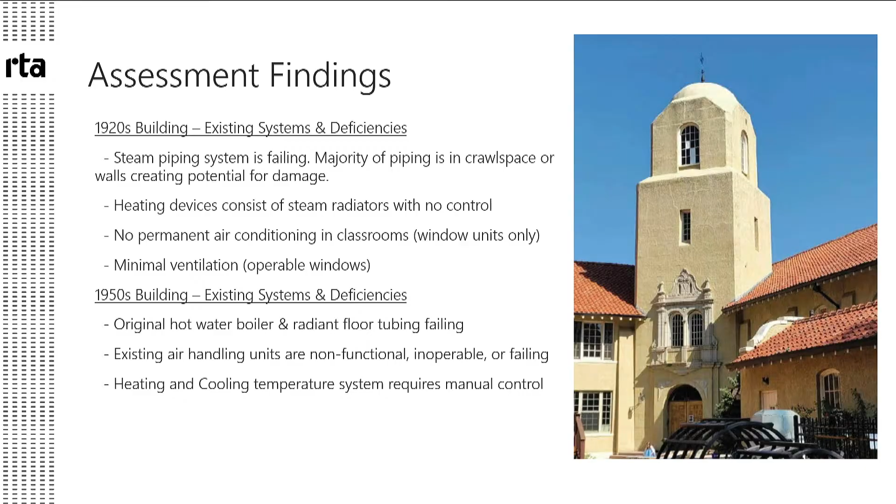The other thing you run into is they're not built the same and they're not as safe as today's equipment. If you have a ground fault, today's equipment is going to trip - boom - it's going to open up and keep from feeding electrical current to those faults. That old gear, we have no real confidence that it will clear the fault the way it should, and that fault may just sit there and continue to spark and arc and start a fire or any of those kind of things.

I heard somebody up here on stage just a few minutes ago before the meeting that they were looking at something or working on something with, I'm assuming, the dimming system for the lights in here, and said that they wanted to fix something, but they were afraid they didn't want to get electrocuted. Those are the issues you run into with the electrical.

So part of the program is to accommodate all the new mechanical. Tim mentioned that there's no HVAC in the building. When you add HVAC to the building, your electrical load goes from here to here. The gear in the building is not built and is not adequate to handle air conditioning, so it has to be upgraded.

Couple other systems that you run into - your fire alarm system. It's old as well.

Not really sure how well it's been maintained, but it seems like there are no faults in it, so that's a good sign. By today's standards, that's an old zoned system, meaning it looks at detectors in a zone atmosphere. It says, okay, we've got a bunch of detectors in one part of the building. If you get an alarm, it tells you we've got something going on in that building. Today's fire alarm systems are point addressable, meaning you'll know exactly which device is in alarm, like the smoke detector in room such and such, northeast corner. So the fire alarm system should probably be upgraded, and we've talked about that, and we've got some things in the program and the project to address some of that. But because of budget, some things are limited, and we're trying to prioritize things and spread the money where it's most needed.

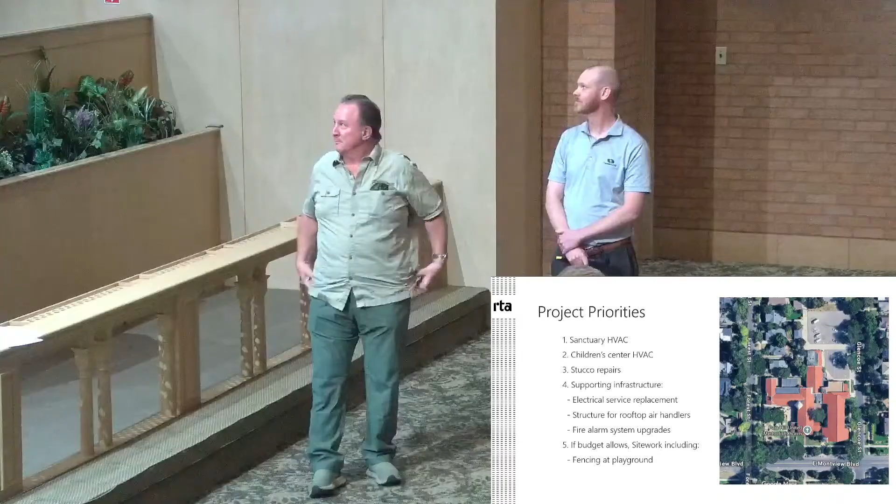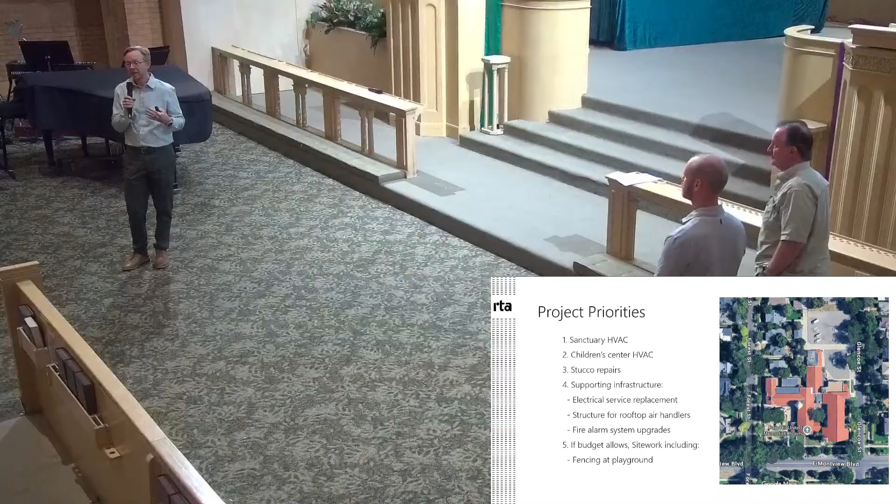Oh, there we go. So speaking of priorities, Don touched on the fact that we need to prioritize. We began early this summer; we were selected by the church to begin the design process. We began the process looking at all these deficiencies that we had summarized for the building, and we wanted to prioritize it because we know that there's more needs than there is funding. So we have to tackle the things that are the most important first.

The sanctuary HVAC is top of the list. You've got to have a functioning heating and cooling system for this space if you're going to function as a successful congregation. The Children's Center HVAC was the next highest priority. Priority 3 are stucco repairs, because we really want to make sure that if you have an area that is leaking and causing more damage to the building, that gets addressed. And then we're talking about supporting infrastructure, which is really getting to Don's point. Anything that we do with the mechanical system needs to have an electrical service to support it. And so we have to make those upgrades.

As necessary so that we can do the mechanical retrofit project. So with that electric service, we know we need to add new mechanical equipment to the building. So we've got some structural work to do on the roof to support a new mechanical unit. And then the fire alarm system upgrades are all at the top of the list. And then as budget allows, there's a little bit of site work, including realigning the fence at the front of the building where the playground is, so that you can egress through those main, prominent doors that exit the building. You should be able to get out to the public way without going through the playground. So we're looking at a minor fence realignment to accommodate that.

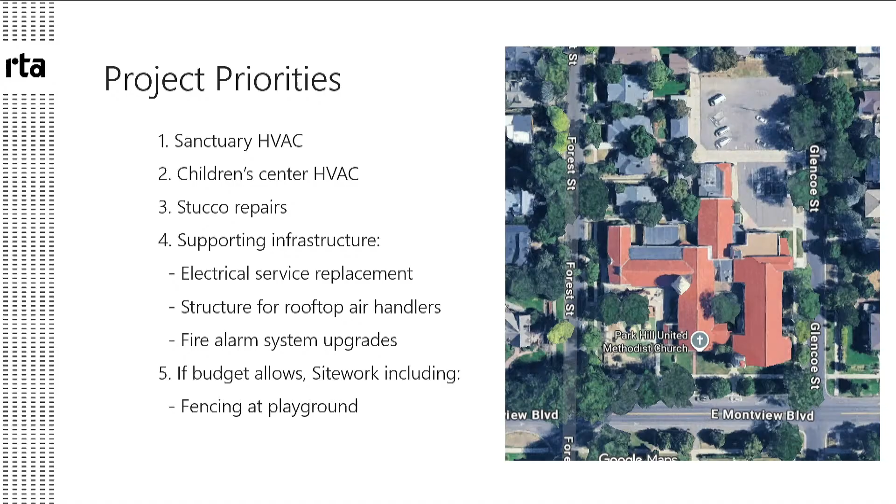My slides going here. I may need, oh, there we go.

So the summary of mechanical scope, Tim? So I'll go a little bit deeper into what I was talking about with some of the things that we're looking at for the mechanical system. On the right side of this, we've got a color-coded map. So I'll start with the Children's Center as I did before.

We asked Cindy and the building team to put together a list of priority rooms so we could have a hierarchy of which ones need to be addressed first and move through that list. Priority 1 is the classroom in blue, priority 2 is the classroom in red, both on the north side of that corridor. Priorities 3 and 4, a little less critical but still important for the Children's Center, are in yellow and green on the south side of that corridor. Looking at the sanctuary, obviously that's a very high priority, so that also follows in blue.

What we've been doing is watching the Denver codes. Denver, as you all know, is on a huge electrification push for the last couple of years. There's been a little pushback in how aggressive they were to start with, so there's been a step back in what they're allowing. I'll explain what I mean by that.

With that in mind, we're looking at providing a heating source of gas-fired equipment, taking it off the steam system, not relying on the old steam piping, and bringing a separate system in for the Children's Center so that you can isolate it from that steam system while still heating those spaces. We'll provide air conditioning, get rid of those window units, provide a permanent air conditioning system, and also provide ventilation through the mechanical system.

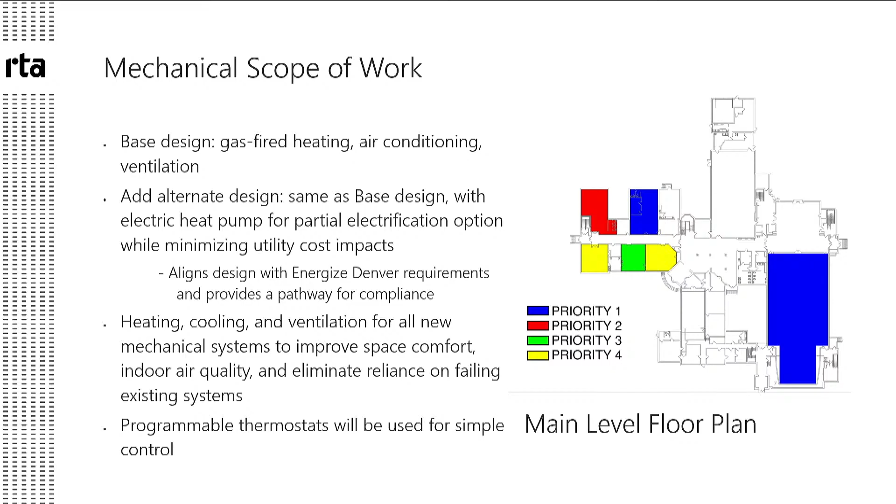Anything else on this one?

Next slide. I can run through a few of our mechanical plans. I know they're a little hard to read, but I'll walk through them. The red button is the laser. Again, building footprints—if I hit the right button here.

I think your battery died, Brian. Is it not going? No, point it at the floor—it's okay. Oh, there we go. Did I just miss it?

Okay, if you can see, the Children's Center is over on the left. We're looking at an overhead ductwork system, serving air to all of those spaces. The new mechanical equipment is very similar to your house—a furnace with a condensing unit outside.

We're looking at putting that up on the second floor—we'll get to that in a second. New ductwork runs throughout those spaces to serve those classrooms.

Over in the sanctuary, we're trying our best not to do anything within the sanctuary itself as far as our work is concerned. The existing ductwork—you can see those half-moon grills on the side. There's ductwork behind there, below the windows.

Our intent is to connect to all of that existing ductwork outside of the space to minimize any impacts to the sanctuary itself.

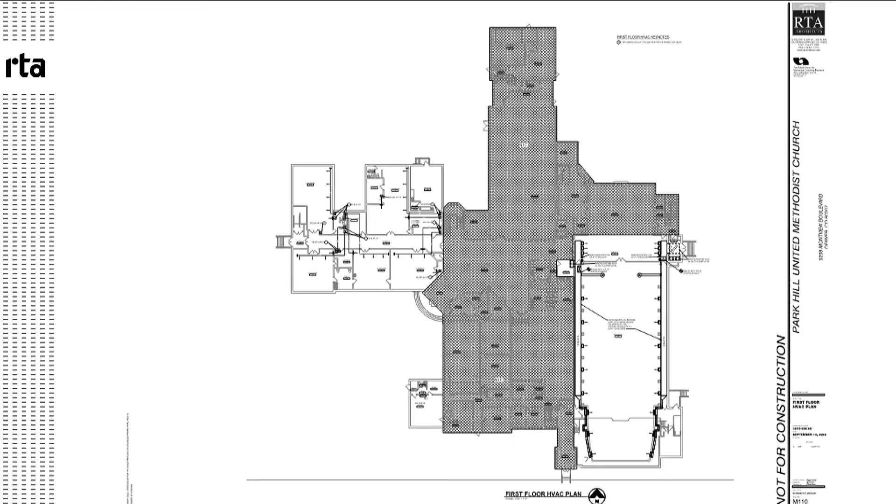Going to the second floor—oh, I'm too fast. We'll get there. Can we go back one slide? Okay, I got it. There we go.

Again, I don't know that you can see much, but there are two storage rooms on the second floor that we're looking at, on either end of that bank of offices on the north side of the hallway.

We're going to put a couple of furnaces—one on the west side, and a few next to the stair storage room on the east side. Ductwork down below serves those classrooms.

One good thing about this kind of system, going back to that priority list, is it really lets us do a room-by-room solution. It's easy for us if we need to pull a room out as an alternate, or for budget reasons.

This lets us target those lower priority rooms and take them out if needed. It gives us a good opportunity to do that, rather than doing a whole system all at once—again, a phased approach moving forward.

The sanctuary is very similar on the balcony level back there—we're not doing anything within the space itself. Ductwork runs down from the roof in some areas outside of the sanctuary, and then going to...

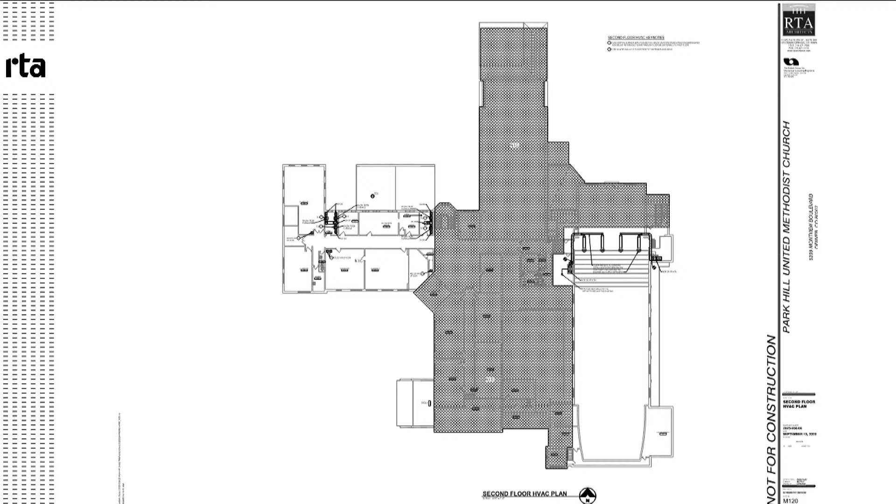...a little bit on the roof, behind and above the balcony, there's that big grill in the back of the church. Up there is another level, and beyond that is a flat roof area. We're proposing a new mechanical unit back in that area.

I mentioned ductwork down below connecting to those grills on the side—that would cover the entire sanctuary, providing all of the heating, cooling, and ventilation, replacing all of the aging air handlers down in the basement, and getting rid of the reliance on the failing chiller and boiler system.

As Brian mentioned, we need support for those mechanical systems. There's a big piece of equipment going on that roof, and we're trying to minimize what we're doing on the second floor ceiling.

We're coordinating with our structural engineer to have a frame above the roof to support that piece of equipment, to limit how much work is needed inside.

Obviously, Don mentioned power to it—there's a lot of new power needs for what we're doing. Running the new ductwork through relies on architectural as well; we need to enclose it and make it look nice in those office areas in the back.

What's not shown on this plan are the condensing units for the Children's Center—the outside units, similar to what you might have at your house for air conditioning. There's a little section of flat roof above those second floor offices, so those would go up on that space.

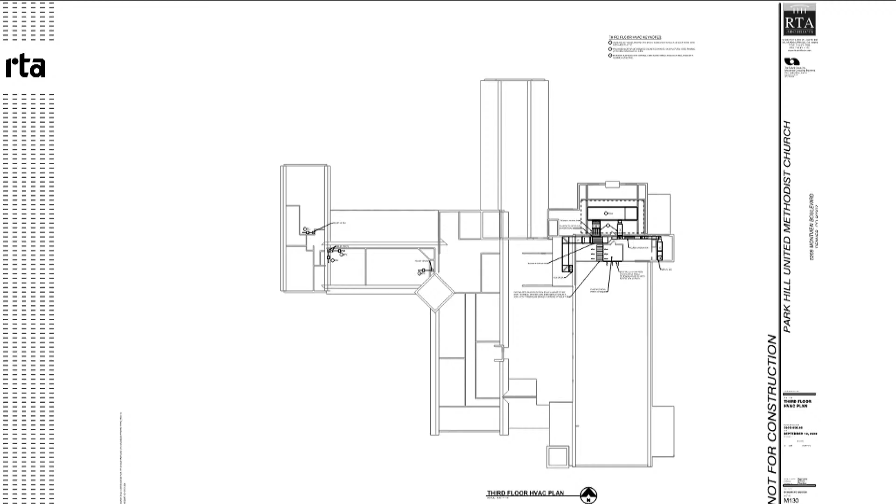So you will see a new piece of rooftop equipment. You can see it from the street, but it's not very prominent. We had a meeting with the State Historic Preservation Office because you are a historic property, so we wanted to make sure that they supported our project. They felt like this approach was appropriate.

Our mechanical unit is in the back of the building. It's not on any of the prominent elevations. It can't be seen from the front street, and it can't be seen from the main historic prominent architectural entrance of the building. They felt that it was very appropriate on the back of the building, that is the right place to put it. So they've written us a letter of support for the project.

We wanted to make sure that you understood what you would see. We can paint the unit. I think we can paint it to match the brick color so that we'll minimize the visual impact of that piece of equipment. Okay?

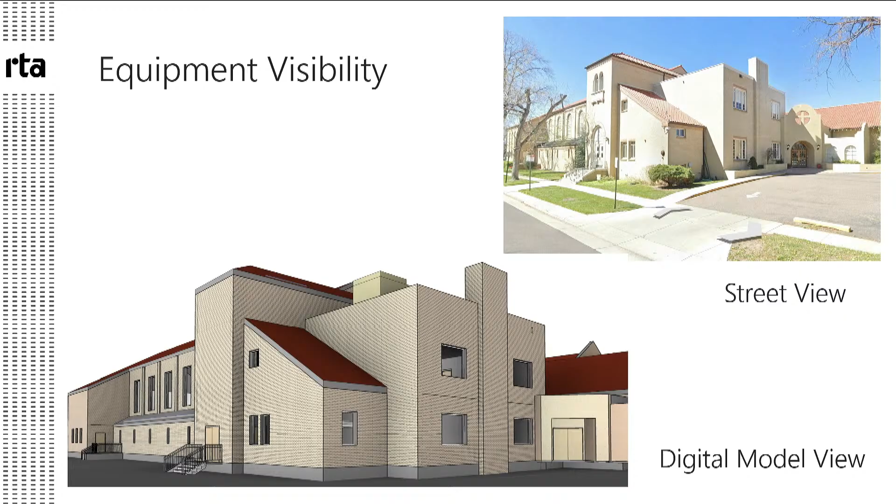Don, you're up. You get bullets this time, but you can wing it too. That's all right.

That's artwork, correct? It's beautiful.

The electrical service is rated 1,000 amps. Your new service will be 2,000 amps, but there's a huge distinction. The 1,000 amps is at 208 volts. The new service will be at 480 volts. So you're essentially getting four times the increase in your electrical service capacity.

That's going to cover the HVAC that they're putting in today, and it's also building in capacity to meet the energy needs of air conditioning throughout the building in the future. So we're trying to get that capacity in now so that you're not redoing the service again with another capital upgrade.

Increased service, I've covered that. The new Xcel Energy service utility metering and exterior main disconnect switchgear is what you see in the picture there. Right now, that was put in, I think, 15, 20 years ago maybe, and that was put there to create some safety disconnects ahead of the gear you have in the basement. That would go away, it would be replaced with a larger cabinet.

The panel boards down in the basement, we have those in the project, I think as an alternate still, Cindy, or are those base? They're part of the base bid now, so the main distribution panels in the basement boiler room will be replaced. So your entire electrical service and distribution infrastructure will be upgraded to accommodate all of these future loads and any changes you make to the building going forward.

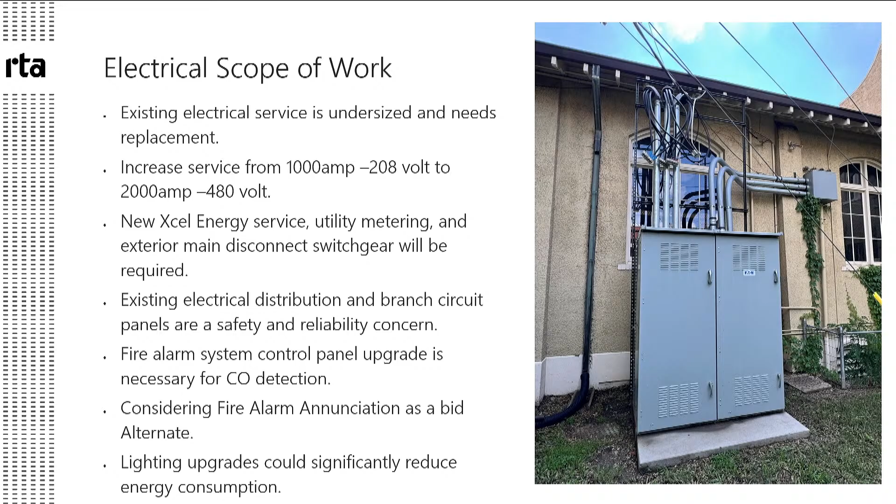I just want to make sure I understand what is not part of this whole project. So, for example, the pastor's offices, the Murphy Room, Babs Chapel, the coffee bar - that's not part of this upgrade to the HVAC, correct?

That is correct. We're putting the infrastructure in now, so the electrical service would support the addition of those elements on kind of a room-by-room basis.

Would you repeat the question? I just... Okay. We have 10 persons online, Gotcha, and they probably couldn't hear Chris, so if you could repeat that. Yeah, and I'll have the mic independently for the next one.

The question was, in our diagram, we showed rooms that were getting mechanical work - what about all the other spaces, the Babs Chapel, pastors' offices? There are other spaces that currently are not adequately served with mechanical, but we are not able to tackle all those elements at this point. As I said, we are putting infrastructure in so that we could support ongoing effort on a room-by-room basis to add mechanical to those spaces.

Except for PJ's office. Right, so PJ's office is the only one that we are addressing - I didn't cover it, and I apologize, but that is a small part of what we're doing. She will have heating and cooling so that she doesn't have a freezing cold office in the winter, which I know is critical. But that is the only place that is getting touched outside of the first floor Children's Center and the sanctuary itself.

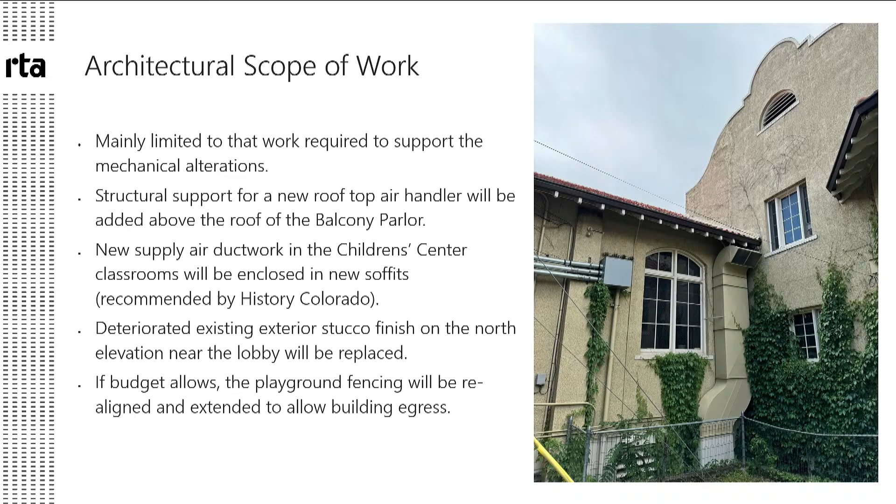—the playground fencing that I mentioned earlier. There's a fence right now that encloses that entire playground area where your pumpkins are out, and we're just looking to scoot that over to create a flow of traffic from the building out to the public way. Did I miss anything in there? Oh, the other architectural work would be the steel frame to support the mechanical unit on the rooftop. So not a lot of architectural work on this project—we're really supporting the mechanical effort.

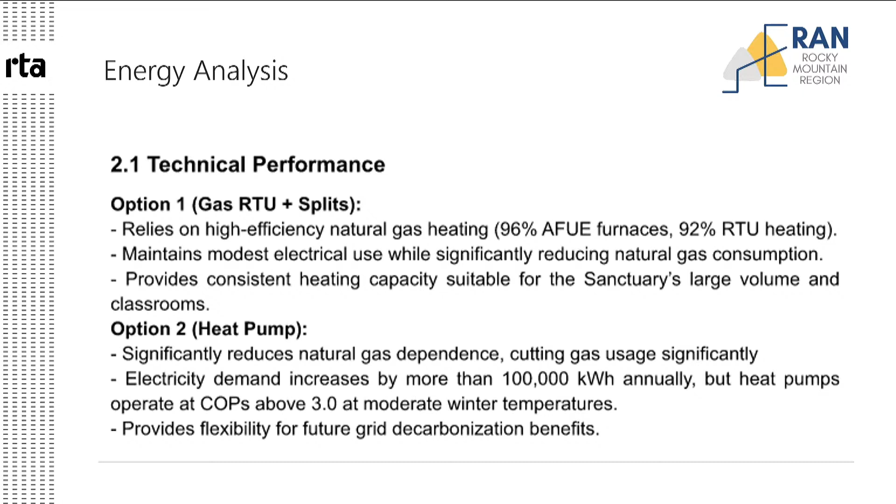So on this slide, I think what we're really seeing is that there are two pathways, and we're going to include both scenarios in our design so that when we finally go out to general contractors and bid the project, we get costs for both the gas-fired unit system and the heat pump system.

What we're seeing here, so there's the two options, and we also ran the energy use in the building based on your current system. This is the energy model run. It's not necessarily telling you exactly what you're spending today. It is a tool that we can use to compare options and alternatives. So we ran the system today, we ran the gas-fired unit, and we ran the heat pump unit.

The top, I need something to point. There we go. Hopefully you can see this.

This is the energy use modeled in the building today, which is 4 million kBTU, giving you an energy use intensity, or EUI, of 62 kBTUs per square foot. That's a method for equalizing energy uses to compare between buildings. A higher EUI means you're using more energy, so lower numbers are better when we're looking at those.

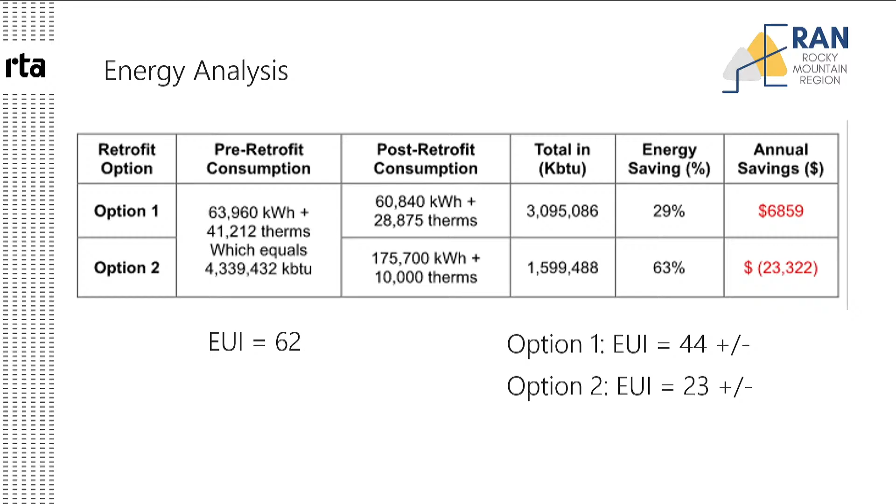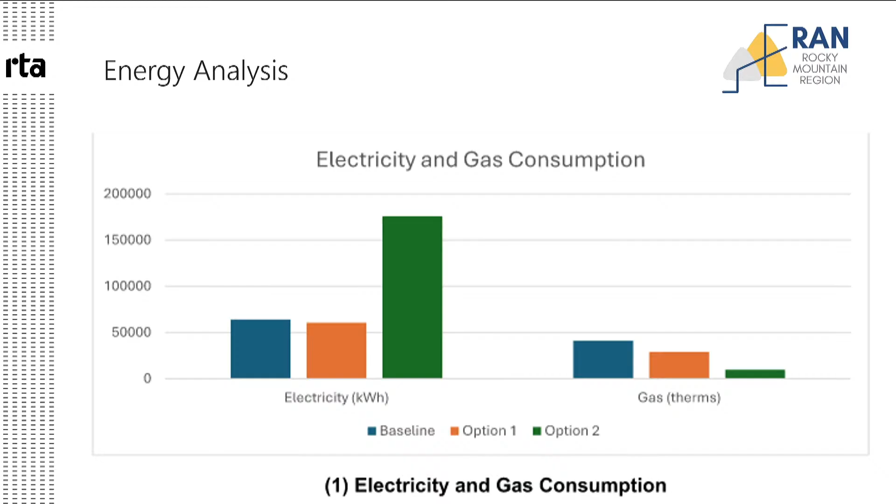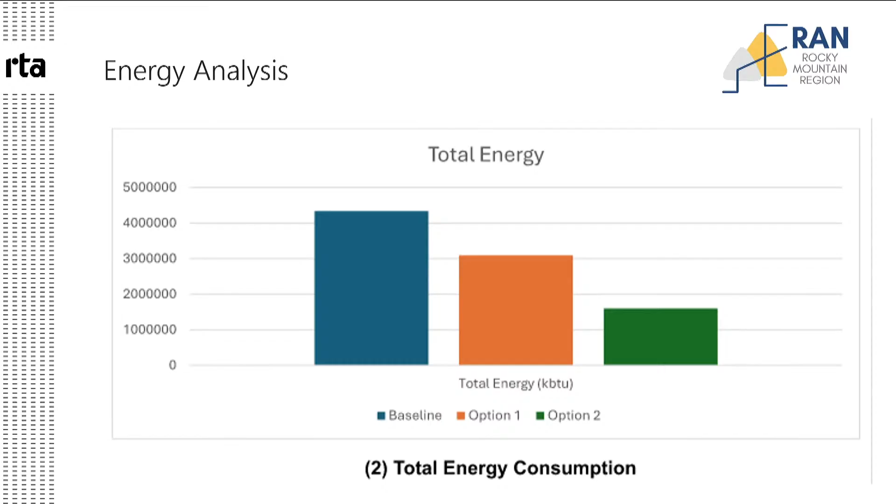I assume that was not me. There we go. Oops. We're both moving slides — I'll let you do it. If you could go back one.

There we go. So for the current system, we also compared life cycle costs based on the energy model run for us by CU. Current system — there's no initial cost because you own the system right now. The annual utility usage through the model is $41,000. As I understand, your actual utility bills are more than this, something in the range of 60, but the model ran 41. Again, this is for comparison — there's no savings because that's your base system. So if you run that for 30 years, it costs you $632,000 for your current system.

Option 1, initial cost was $824,000. Annual utilities predicted to be $34,000, saving about $6,800 on utilities.

The life cycle cost is $1.3 million. Option 2, the heat pump, is a little bit more expensive. The utilities cost more, resulting in a negative savings, or an additional $23,000 over what you're spending now, for a life cycle cost of $1.8 million.

What's not shown here, which I put boldly on the right, is this $632,000 for your existing system. We didn't want to guess at your maintenance costs, but every year a lot of money is spent to maintain that current system. Over the last 2.5 to 3 years, we've spent about $100,000 in repairs, and we don't expect that to go down. It's probably going to continue to go up. So you're going to continue spending money to keep the existing system operational, and you have risk because it could fail at any time, causing damage when pipes fail and leak.

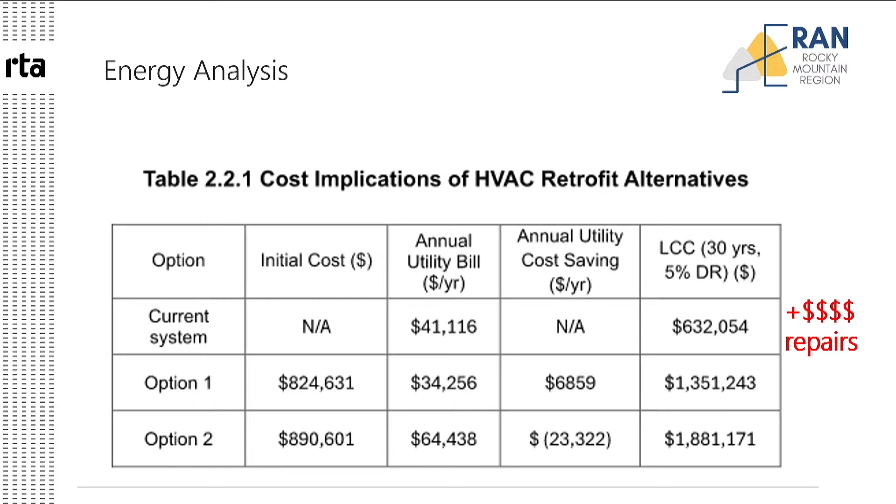So takeaways from the energy study we looked at: the base design, the gas-fired unit, still saves you about 30% over your current system. You could get a lot more total energy savings with the heat pump. For comparison, Energize Denver is going to require an EUI of 42 by 2032. We believe you can satisfy Energize Denver's requirements using either system, but you'll certainly go a lot further toward their goal of being all-electric with the heat pump unit.

We have investigated the program. You can apply for equity priority status as a nonprofit with limited resources, and they will work with you. What they really want is to see institutions making an effort to reduce energy use and communicate with their program. If you go with the gas-fired unit, our model showed your EUI in the middle 40s—probably not all the way to the Energize Denver target, but close. As you continue mechanical projects in more rooms, that energy will come down. We believe they'd see that as a positive sign, and you wouldn't necessarily have trouble complying with Energize Denver in the future.

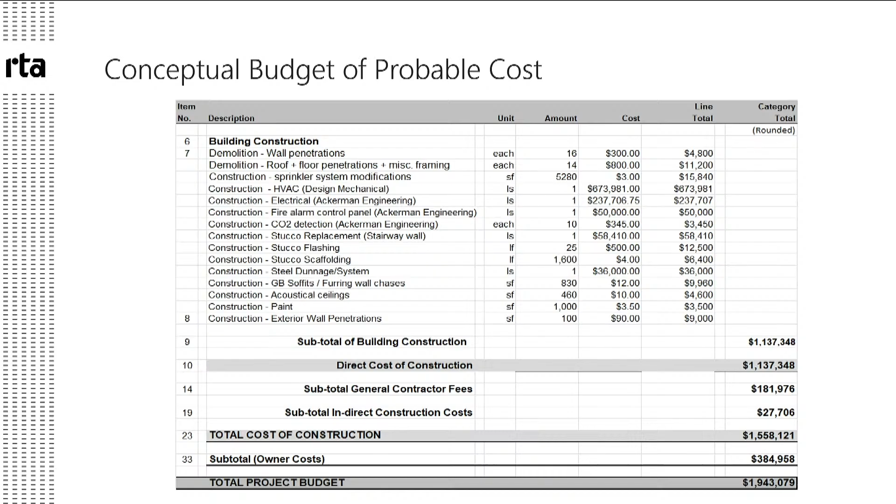We've also looked at some alternates—things we would include in our design through the completion of our process and price as options. Alternates are things you can choose to elect or not. So the alternates are the playground fence realignment, about $15,000, and the heat pump RTU option, which is the upcharge if we go from gas-fired units to heat pump units—an upcharge of $82,000 in first costs.

We also looked at 3 additional classrooms in the Children's Center. In the base bid, we have 2 classrooms that we're doing, and we've priced separately the 3 classrooms on the south side of the hallway—that would be about $227,000. Then we priced the fire alarm system with voice notifications.

That system is quite a bit more expensive than what you have right now, because it requires all new devices—it requires speakers. It's a much more sophisticated system, and they're quite expensive. Taking a rough cost per square foot based on industry information, it was about $339,000 for a full fire alarm system replacement. The high cost of that system is why we're looking at whether we can do a partial replacement instead of replacing it with an entirely new system.

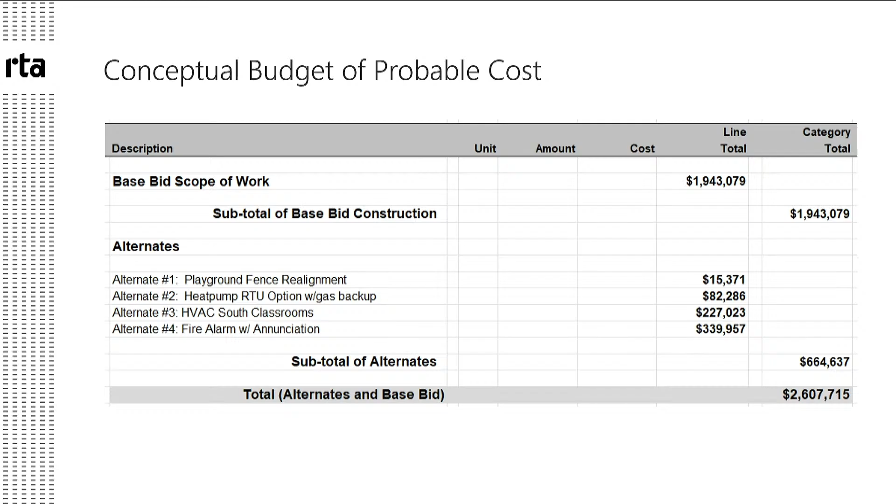Schedule. Oh, question behind me. There's a question from online asking if the fence repair is one of the priorities approved at the last charge conference. I don't know that we specifically talked about that, but you could mention egress, the fence.

How do you speak to the exiting portion? Well, I did describe the exiting importance of doing the fence work. And the question was whether or not that was one of the approved items. It was listed as a scope item at the charge conference, I do know that, and it is something we plan to do if we can afford to do it. It was a relatively small cost compared to all these big mechanical numbers Tim's showing our way.

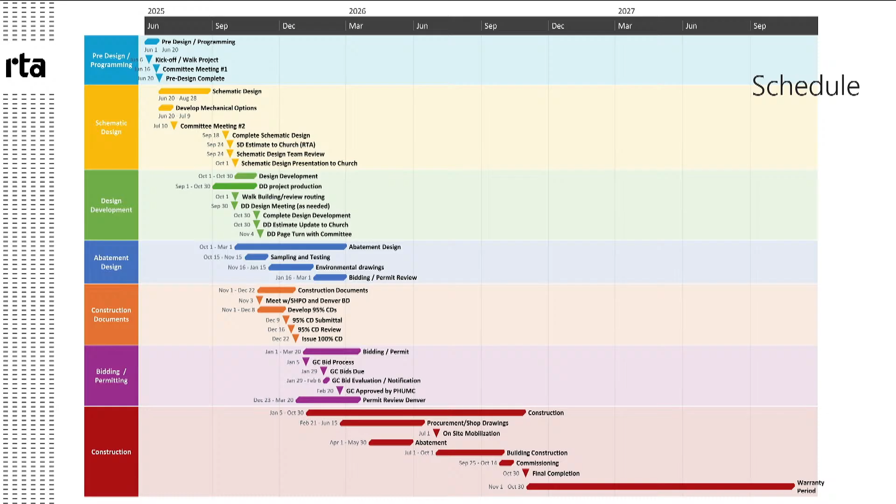So this is our overall schedule. I do have this broken up, but I wanted to show you all the parts. We've broken it up into multiple phases of design. We're in schematic design right now. Schematic design is kind of what it sounds like, very conceptual. We know our general approach and understand the kinds of systems and equipment we're going to have, but all the details are not worked out yet.

We're moving into our next phase of design called design development, which is our green part up there. We're going to finish that up in early November. Once design development is done, we move to construction documents. Construction documents is exactly what it sounds like: it's going to be the final plans the contractor will build from, and it's what we'll submit for a permit to the Denver Building Department to get the work approved.

Once we have the construction documents complete, we submit for a permit. We'll also bid the project to multiple general contractors. That would be complete by the end of the year. We're looking to have construction documents done in December, put that out to bid, and select a contractor, having a contractor on board in the February timeframe. So I did make the next slide a little bit bigger.

So yeah, the green design development, we've broken it down into multiple tasks, finishing up early November. We will also begin abatement design. Cindy's working with an abatement and environmental company, and now that we have schematic design finished, they're going to take our design, look at the areas of the building we're impacting, test for asbestos, and come up with a plan that we can bid to an asbestos contractor to remove any hazardous material that may be in our way.

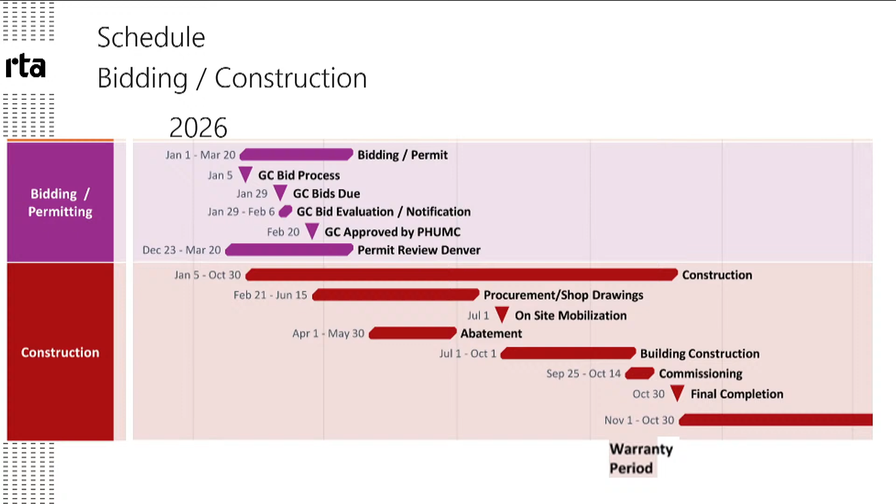Question on schedule? Okay.

Yes, this is my last slide, then I'll turn it back over to you all. But we wanted to remind everyone that this is the first phase in an ongoing effort to replace the mechanical systems in all portions of your building.

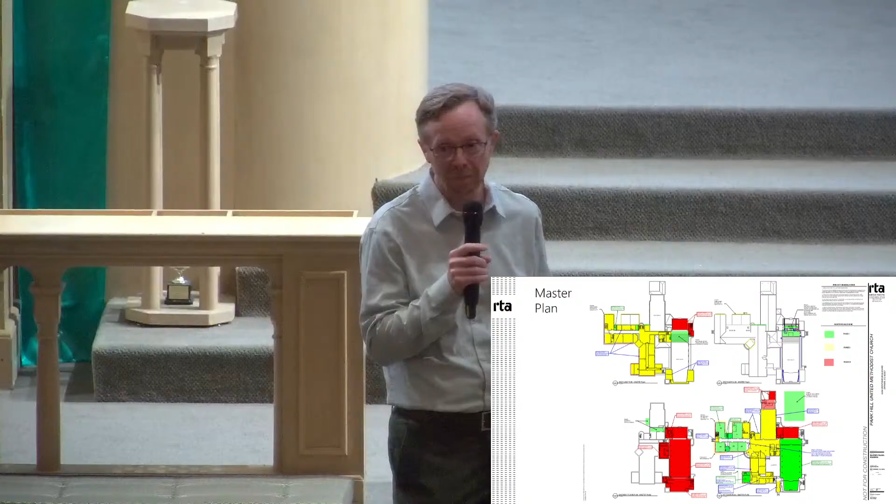The red spaces are the lowest priority elements, including the fellowship hall underneath us. It's just not as critical. But we're going to lay out a long-term vision for how you'd go through all the areas of the building and arrive at a complete building mechanical replacement project. So we are thinking about that.

Any questions as we turn it over? Yes, question.

Do you anticipate that we would be able to use the building during the construction time, or periodically be out of the building? One benefit of doing a mechanical project during the summer is that you won't be relying on that system to occupy the space. There may be points when it's not comfortable in the building because systems may be down, so we'll work closely with the contractor to minimize the impact. I think you'll be able to utilize the building through the majority of the project with minimal impact, but there will be points in time when the impact to this space could be possible.

I'll speak quickly to the electrical part, because we are doing a service upgrade. There will be a point where we work with the contractor to build the new service, get it energized, leaving the old service energized until the new one is complete. There will be a switchover period, probably 7 to 10 days, where there just won't be any power in the building. So you'll have to contend with that at some point.